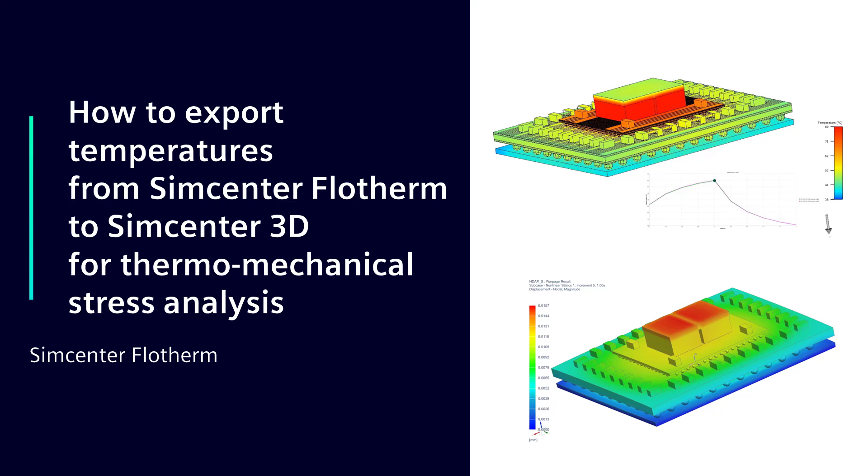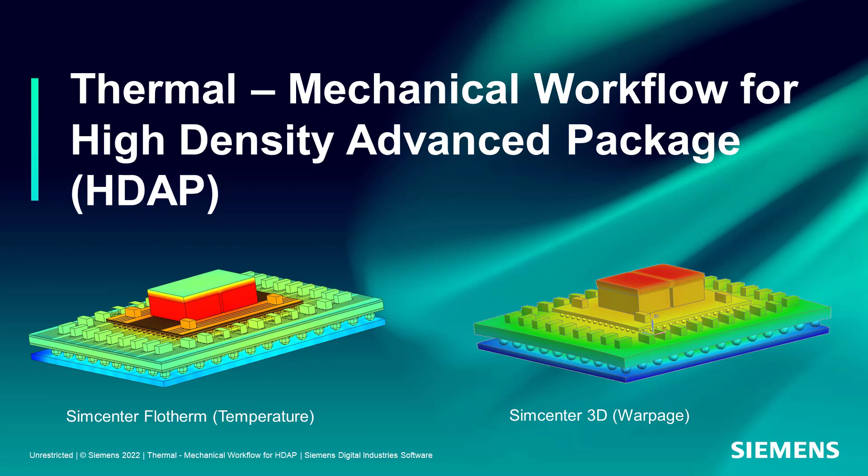In this presentation, I will go over a thermomechanical workflow for a high-density advanced package. So here, Simcenter Flotherm is used to solve for the temperatures, and then that data is brought into Simcenter 3D for structural analysis where warpage and creep is analyzed.

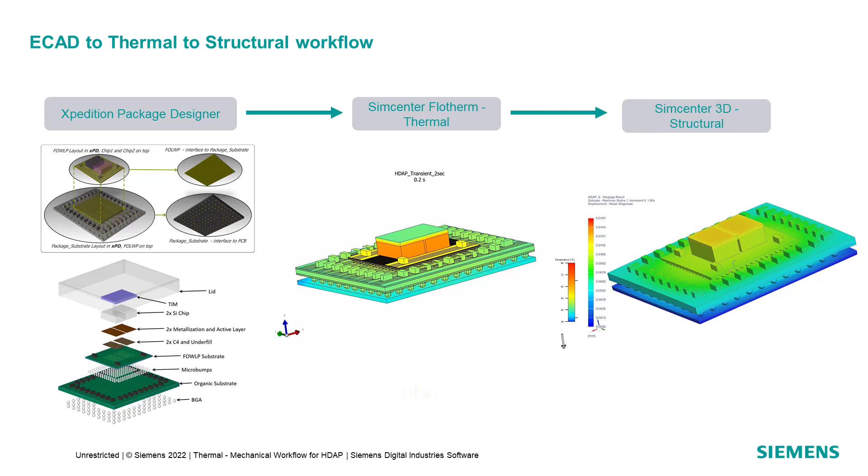Okay, so jumping into the workflow, we have a fan-out wafer level package that is designed in Xpedition Package Designer, where two dies are mounted on an organic substrate. And then this model is brought into Simcenter Flotherm through EDA Bridge, where it is thermally analyzed. The temperature profile of the package is then imported into Simcenter 3D, where structural analysis is performed.

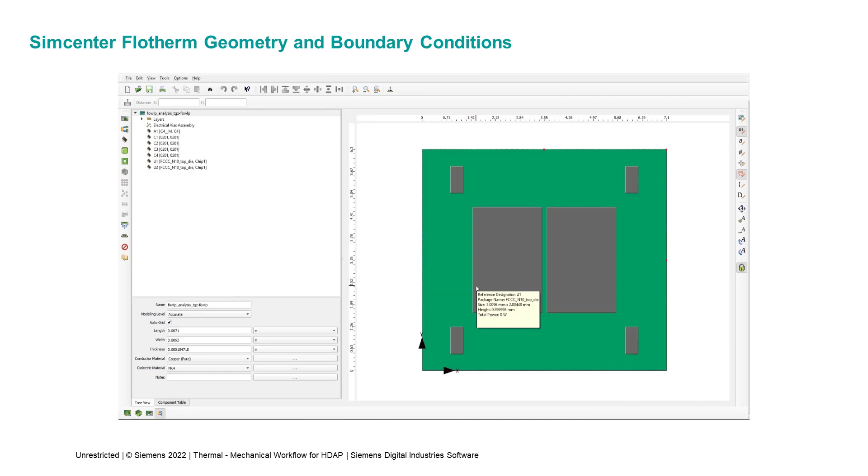Here we have a video showing the Simcenter Flotherm geometry preparation and boundary conditions. Starting in Simcenter Flotherm, EDA Bridge is first opened. With a range of EDA data formats supported, an ODB++ representation of the fan-out wafer level package exported from Xpedition Package Designer is selected. U1 and U2 components represent two dies. They are selected and a silicon material is applied to both.

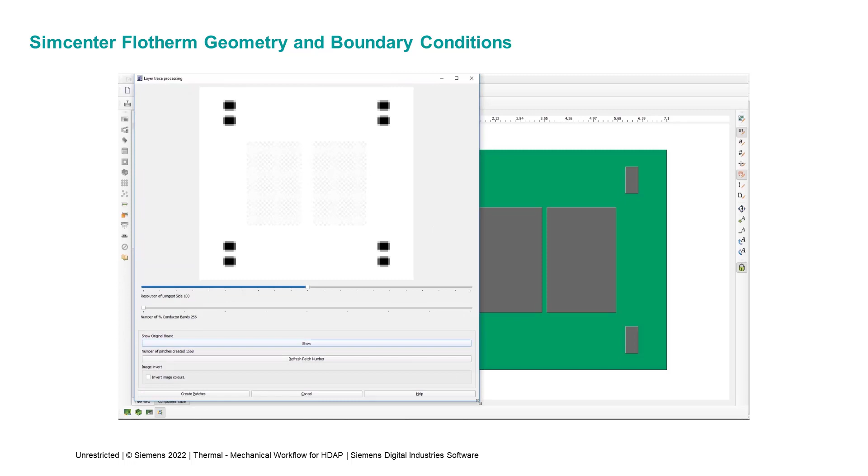The percentage coverage of copper on each of the redistribution layers is extracted from ODB++. Instead of the copper being assumed to be equally redistributed over that layer, a refined thermal representation of its distribution can be controlled by the slider bar. In this case, a resolution sufficient enough to resolve all the pads that will connect to the C4 bumps.

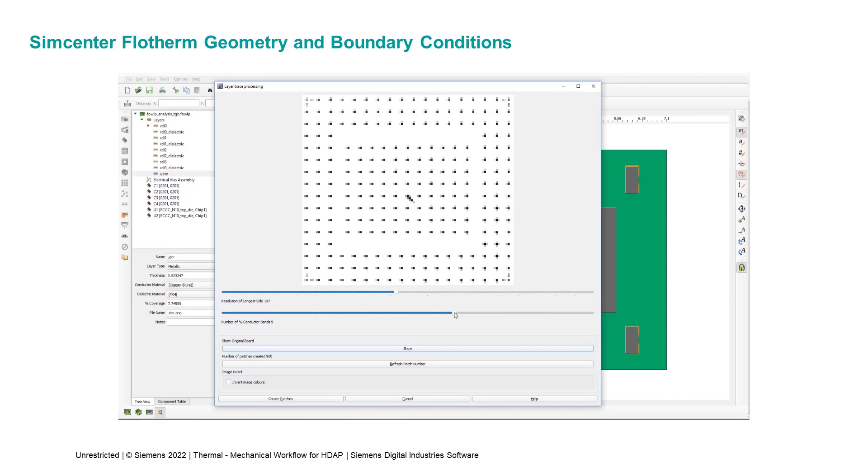The same approach is taken for the bottom layer with a resolution selected to resolve all the micro bump connection points. Once the ODB++ data has been thermally prepared, the thermal model of the package is then transferred to Flotherm.

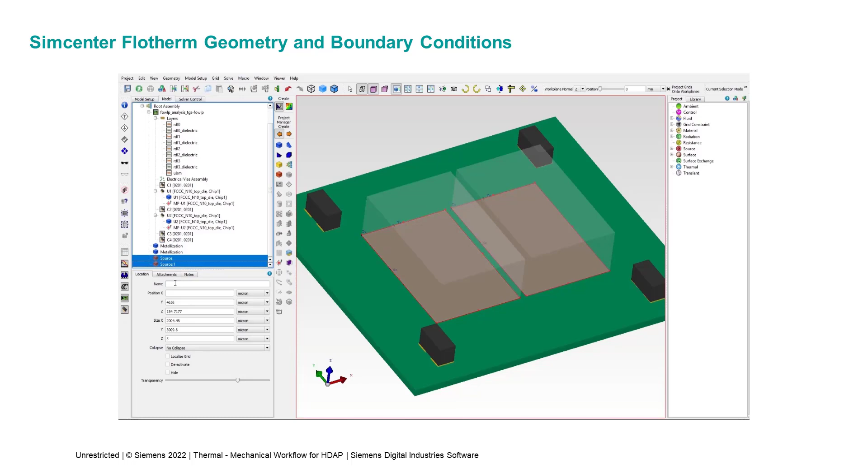A more refined thermal representation is achieved by creating a metallization layer on the flip side of the chip with the appropriate materials assigned. The power dissipation is defined in the active layer of the die. The active layer is placed between the metallization layer and the rest of the silicon.

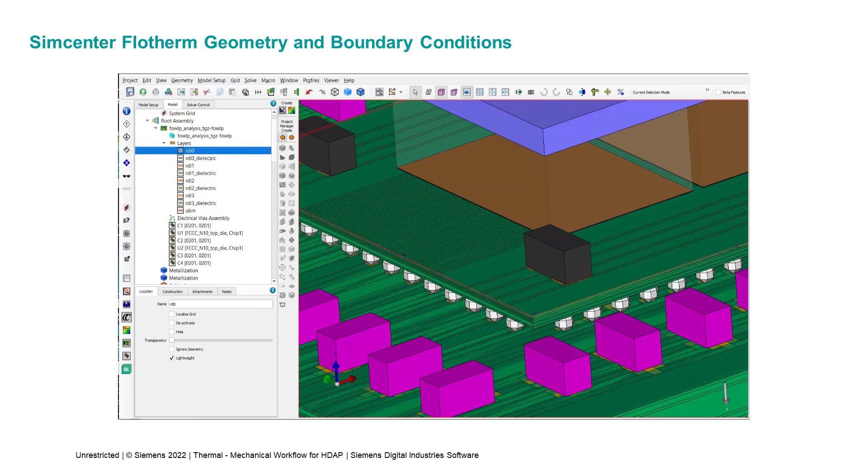Now, skipping a few geometry preparation steps for the sake of time, here's the final package. The organic substrate was brought in and processed the same way as the fan-out wafer level package in EDA Bridge. Here we see the individual layers, each with different conductivity values that were derived from EDA Bridge on the fan-out wafer level package. If we hide the metallization and active layer, we can see the bumps as well.

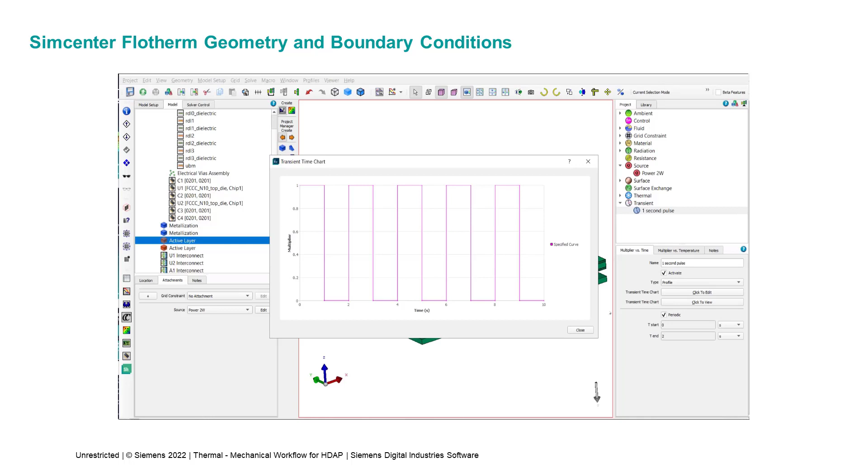Now let's take a look at the active layer power source. Attached is a 1 second on, 1 second off pulsing power. The total time for this thermal transient analysis is set to 10 seconds. Here we look at the transient properties. 10 time patches are created with an increasing power distribution type for every 1 second. This ensures we capture the power transition areas with increased time step resolution.

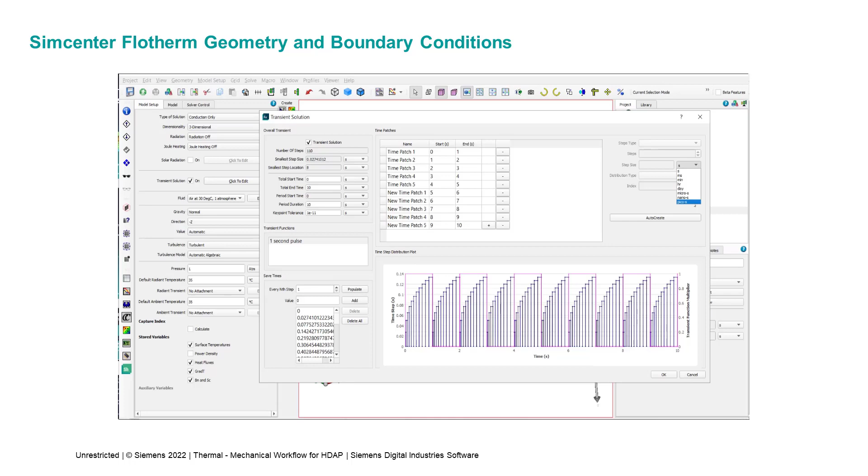Also, I wanted to mention new in Simcenter Flotherm 2210 is the ability to represent sub-microsecond time variance for power cycling and time steps. Now we solve the Simcenter Flotherm model, and here we're looking at the surface temperature plot over a 10-second period.

Now we can start exporting data from Simcenter Flotherm that is needed in Simcenter 3D to perform a structural analysis. First, we export the field data, which consists of the temperature results of the package. When we select that export option, we have the ability to filter which time steps we want to export the temperature results from. In our case, we export from 8 to 10 seconds, so we use the filter option starting time from and set it to 8 seconds. Next, we export the CAD geometry by going to the Export Project option.

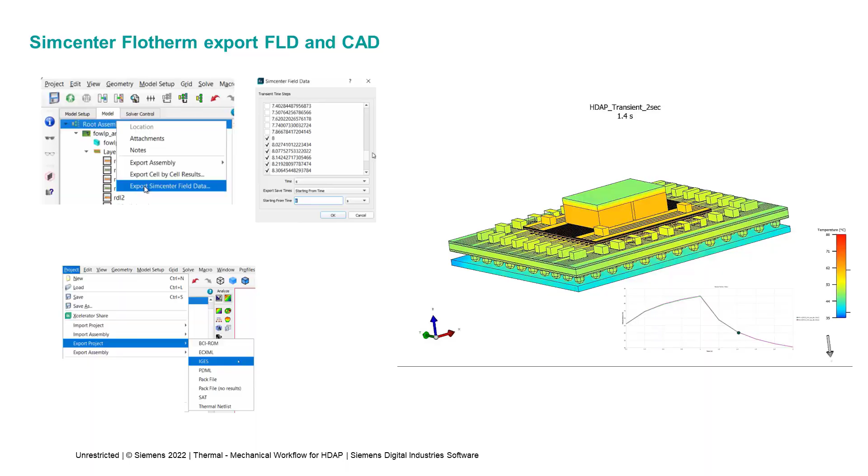For dynamics, for example, you can do structural vibrations and structural behaviors. For acoustics, for example, in an electronic box, you can simulate the acoustics of a fan.

Here's a slide on the overview of how to set up the Simcenter 3D model using the Simcenter Flotherm data. First, we open up the CAD file that was exported from Simcenter Flotherm. Then we assign the proper materials to the model. Next, we create a structural mesh and glue simulation objects across the various layers. Then we apply the thermomechanical boundary conditions, including the FLD file containing the temperature profile of the package from Simcenter Flotherm. And finally, we set up a nonlinear solution requesting warpage, creep, and other metrics of interest.

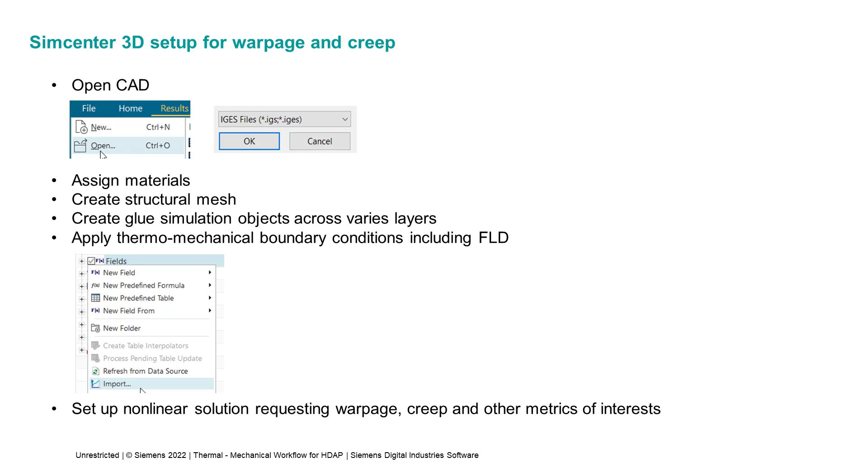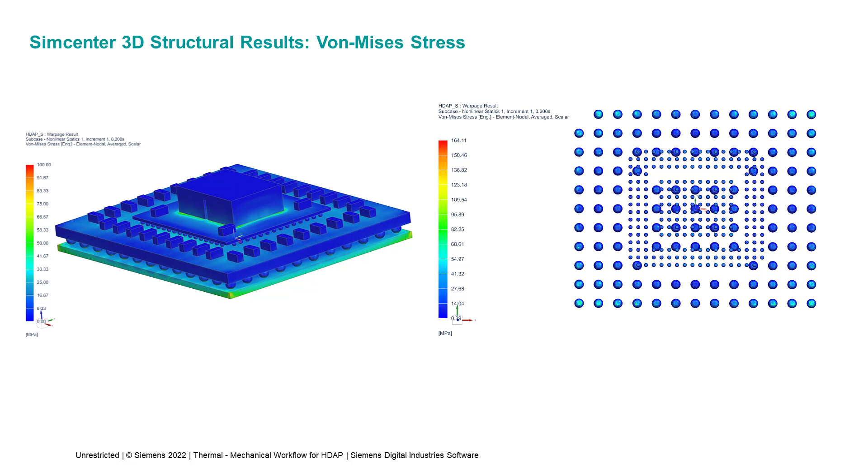After solving this Simcenter 3D model, we take a look at the results. There's a variety of ways to look at results, from stresses and strains and so on. Here we are looking at the von Mises stress, which is a value used to determine if a given material will yield or fracture. And as expected, as we can see on the right, there are higher levels of stress at the corners of the package solder balls.